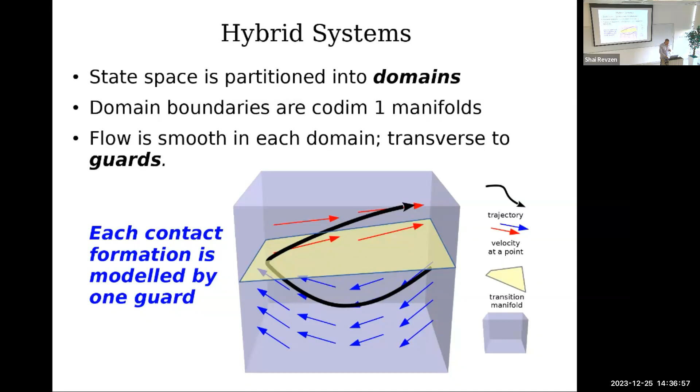So let's recap for a minute why we use hybrid models at all for these sorts of problems. It's because of this idea that physicists call a collision. What's a collision? It's something where we know the input state and we can deduce the output state. We don't care about all the mess that happened in between, because we have enough invariance to constrain the outcome. So all of you have probably done your undergrad...

Elastic collision: you conserve energy, you conserve momentum, you know what the outcome is. You don't care what happened when those two things hit each other. The outcome is predetermined. That's in general the theory of collisions, right? We reach a predictable steady state and avoid all the complications we might otherwise have, because we like this abstraction of rigid bodies that don't actually exist. You'll see that plays a role here.

Acoustic propagation through the bodies, which happens during a collision, plastic deformation, surface interactions—there's all sorts of complicated things we want to avoid modeling by using collisions and hybrid systems. But it turns out you can have all sorts of hybrid dynamics.

The most general form of hybrid dynamics is an arbitrary state machine. The guards represent transitions. So if we start here, if we cross guard number 1, we have a new state. If we cross guard number 2, we have a new state. If after 2 we cross 1 again, we have the 2-1 state, and here we have the 1-2 state. Basically, each history could have a completely different dynamic.

At the other extreme, you can have what are called complementarity systems. Those are used often in simulation of multi-legged systems—for example, work by Posa and Tedrake uses a lot of complementarity systems. There, each guard only gives you an additive effect. So if you go through B, you have F plus B. If you go through A, you get F plus A. But if you go through the second guard, what you do is completely determined—it's going to be A plus B. There's no more freedom in the system.

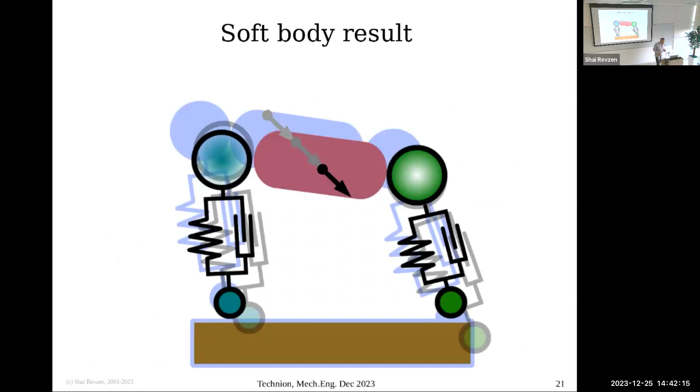Or if you think about it differently in the context of what I did before, it's really a soft body result. This leg hit the ground, it's generating some force. Now the other leg hits the ground, and it has its own additive effect on the center of mass. Both legs have interacted, but the center of mass is still continuing to move with its inertia and being affected by those forces. So that's a different way to think about why event-selected systems are relevant.

So let's talk a little bit about the mathematical properties. And by the way, all of this stuff is in this 2016 Applied Dynamical Systems paper.

So the idea of event-selected systems is you have a region of state space where you have some guards, and they intersect at some point rho. What we demand is that the flow is smooth in each of the domains between these surfaces. And furthermore, this is a somewhat weird condition, you might think at first, but if anyone's interested, I can explain why without it, very bad things can happen.

All the flows have the property that they are monotone with respect to the various guards. So if I have some guard function that has a zero level set at the guard, the Lie derivatives of these guard functions are all positive, strictly bounded from below. That means all the events will eventually happen. And once they happen, they can't reverse. You can't hit the ground and bounce back up. If you want to do that, you have to treat that as two different guards.

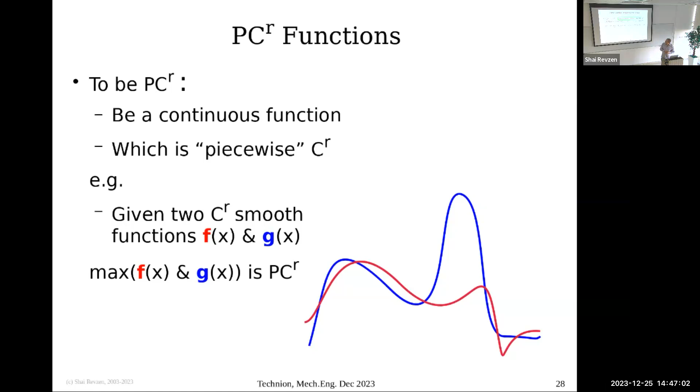And it turns out that there's a pretty interesting mathematical theory for those, and it relates to this idea.

I'm sure everyone here has taken analysis and knows about the directional derivative. A function is directionally differentiable if you can take this sort of expansion. This is the directional derivative, we have a scaling here, and we take the scale to 0. It has a derivative in the direction h if this limit exists and is 0. If this limit exists and is 0, the directional derivative is df.

There's a slightly less flexible notion of derivative where we change the limit. This is called the Bouligand derivative, where h here is a vector, and we take the limit of h to 0 as a vector.

If you do that, it turns out that for PC^r functions, this limit will always converge. When it converges, when the Bouligand derivative exists, it's actually the same as the directional derivative, because the directional derivative is just one particular way to take this limit. But there can be cases where the directional derivative exists and the Bouligand derivative does not.

But the interesting thing about the Bouligand derivative is that Bouligand derivatives together with PC^r functions recapitulate a lot of the standard theory of analysis. You have the chain rule, you have the implicit function theorem, all these standard building blocks of analysis exist there.

Question: When you take this last derivative, do you change the direction of h or keep it? Answer: You're allowed to change the direction of h because you're taking h as a limit to 0 as a vector. That's exactly the key point of what makes it different from a directional derivative.

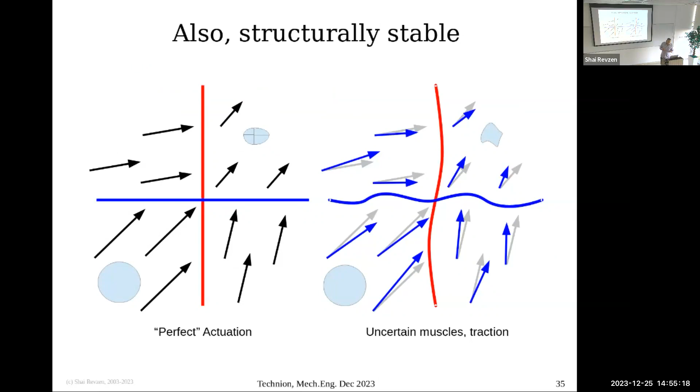Really, one way to understand what's happening in these systems is you can think of these surfaces and look at the impact times - the time it takes for each guard to happen. It turns out that if you have enough guards, you can rewrite your entire space just in terms of the times it takes for events to happen. Why is that a good system of coordinates? Because in that system of coordinates, everything becomes simple. All your flow is diagonal, because time flows the same way.

So time flows 1, 1, 1, 1 in all the coordinates - one unit of time per unit of time. All your guards are just hyperplanes. So really the existence of impact times being a nicely behaved function implies that there's a map that rectifies everything, and the behavior of the system is like the behavior of a flow box. Nothing bad can happen there basically because we have this nice conjugacy - a conjugacy that takes the dynamics in a real system into a flow box, and nothing interesting is happening in the flow box.

Okay, I'm almost done with all the annoying math, and we'll get back to mechanical engineering in a bit. We need to do one more thing, and that's talk about stability, because really that's one of the main things we care about in robotics and engineering in general, or in understanding biological control.

So how do we do stability in smooth systems?

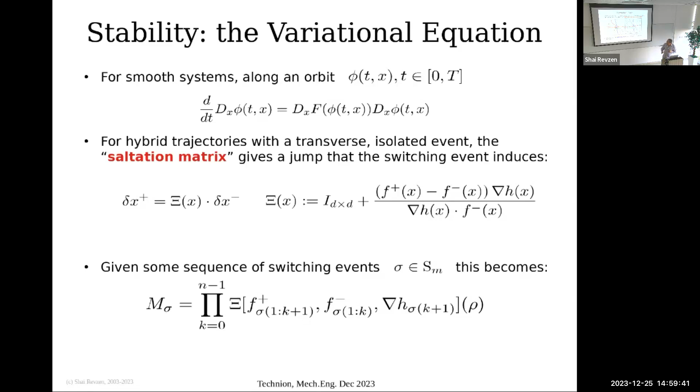The way to understand what happens there is we use this sampled vector field that's zoomed in, and we compute these projection operators, and we can use this to actually very quickly integrate multi-contact dynamics. To give you a sense of what I mean by very quickly, it's actually really simple to do.

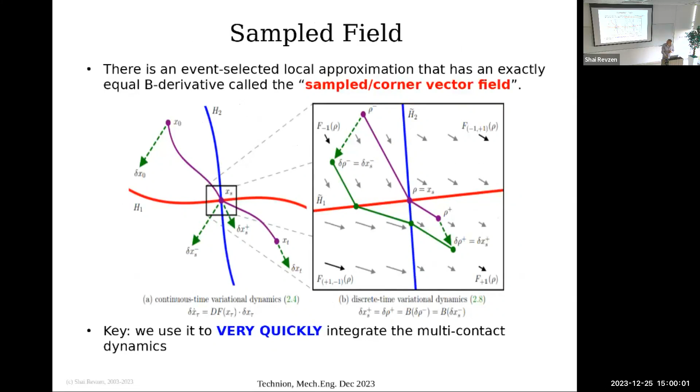This is in a paper we published a couple of years ago. The entirety of the Python code that does the computation of taking an initial condition through an arbitrary collection of hybrid transitions to its outcome is literally 11 lines of Python code, with about 40 pages of math to prove that they're correct. So it's one of those cases where the problem is a lot simpler than it looks on the surface.

So let's look at an example. Here's an example: we have a sort of two-legged system. It's a 2D problem. It can tip. It has two legs that can hit the ground, and both legs can hit the ground at the same time.

We have a spring damper that activates on ground penetration, and the spring dampers can be different for the different legs. So we can have some interesting dynamics here where there's a double collision point, and if we tip slightly on one side, one dynamic takes effect; if we're tipped on the other side, another dynamic takes effect. Without damping, the system is clearly continuous, but with damping, the velocity is actually going to have a different value the moment you hit the ground. So it can create a discontinuity in the vector field.

So if we take this system—the two-legged chair bouncing on the spring damper ground—and compare using a conventional integrator, which detects the events, runs an ODE integrator, detects the event, solves for the collision point, integrates to the next surface, solves for the collision point, then solves out, versus using our approximation, we get a speed improvement of about 1400 times using our algorithm. If we do that with a three-legged chair, we get an improvement of about 43,000 times faster. It's just spectacular—it's the difference between dealing with a hybrid system and basically dealing with a smooth system. You don't even feel the fact that you're working on a hybrid system.

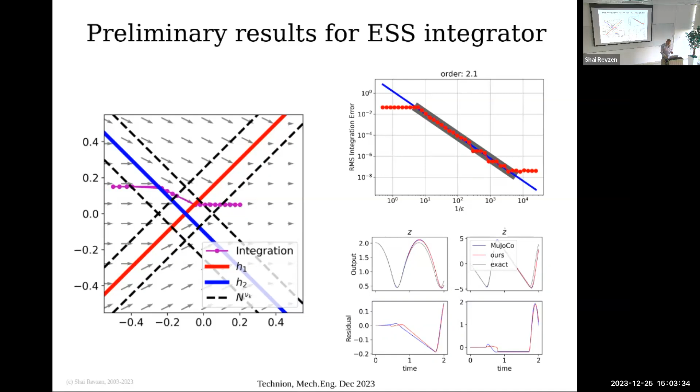So let's get back to mechanics. Now consider a mechanical system with these conditions. Mechanical systems are generally second order, but let's say our guards only depend on position—potentially they could depend on velocity as well, but let's say they depend only on position. Most manipulation and legged locomotion problems are like that: whether you make a contact or not depends only on position coordinates, not on velocity coordinates.

And the other thing is, let's assume the situation is one where we have additive effects. This is a situation other people looked at as well, but it's fairly common that when you establish a contact, you add a force, and these forces are just an additive effect.

Now, why is that interesting? Because the sum doesn't depend on the order at all. So what this means is, it's a very strange result, but the order of collisions didn't matter—you're going to get the same derivative. The result is exact, not after truncation. This is an exact collapse—only the first order term, which is the sum, survives this product. So the order of collisions didn't matter.

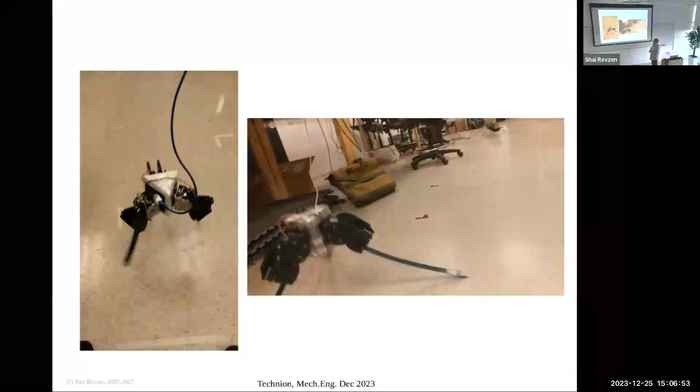So we wanted to build a 3-legged hopper. These are our first attempts. We put some spring legs, and these hoppers hop pretty nicely.

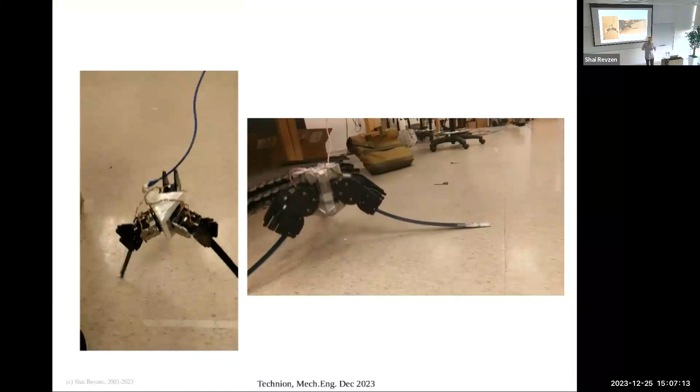But we discovered something kind of annoying: even though they look like they're hopping, that's a lie. What they're really doing is losing all their kinetic energy on the collision with the ground, and then the motors are regenerating all the energy for the next hop. So if you ask, does this robot remember its history? Does the initial condition actually survive the collision? No, the initial condition is completely annihilated. Your perturbation energy goes to 0, and then you're regenerating an entirely new hop.

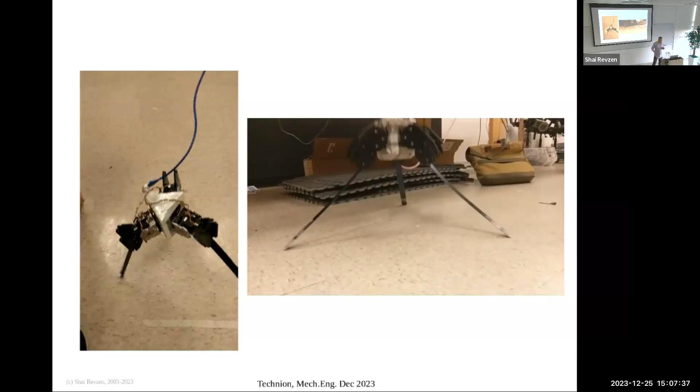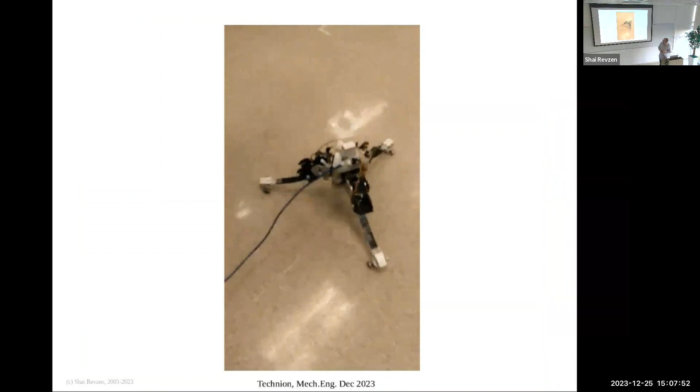So we tried to improve by changing the legs. These legs have rollers now, different kinds of springs, only position sensing on the motors, and an even better wheel to prevent friction, because we thought we were losing all the energy to friction with the ground. We tried a bunch of different springs, pairs of leaf springs with different kinds of bracing in between them. This is a high-speed camera. This one buckles completely, this one buckles less, this one doesn't buckle at all. We're trying different kinds of springs to try and achieve recovery somehow.

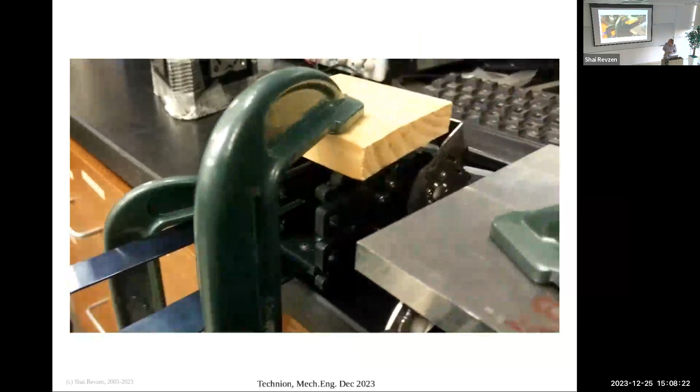All of that didn't work until we did this experiment, and it made us realize what's going on. So what you have here is a spring clamped to the table, spring clamped to its attachment, spring attached to the motor, motor turned off. The motor is killing all our energy.

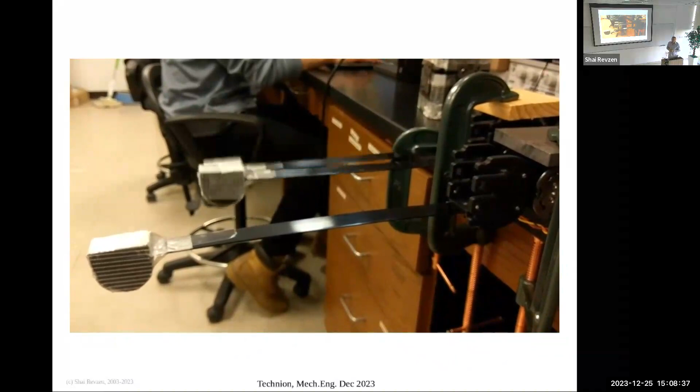Basically, whoever told you that series elastic actuation conserves energy was halfway lying, because if you have a PID controller on your motor, what's the PID controller doing? The D term is pretending to be a damper, and it's taking all the energy out. It's not pretending. That's its job, to take the energy out. So that means you're losing all the mechanical energy in your system, and that mechanical energy is an expression of your initial condition. And so if we want dynamics that actually go through a collision and survive that collision to have some meaningful outcome, so we can prove this theory works, we need to do something different.

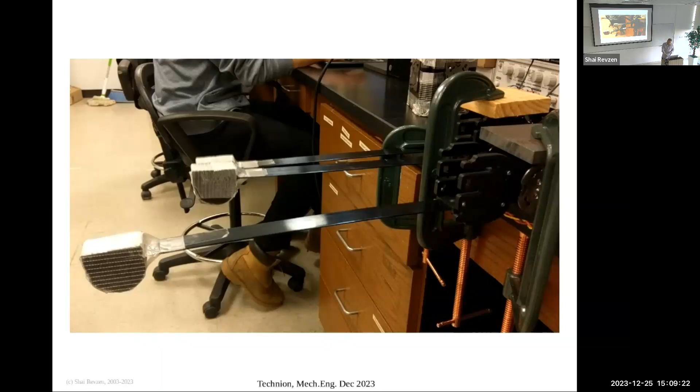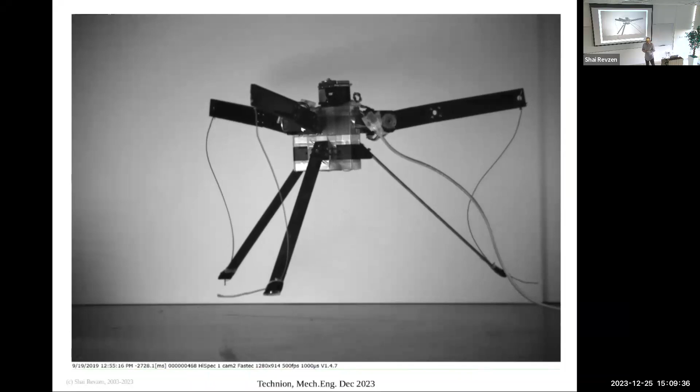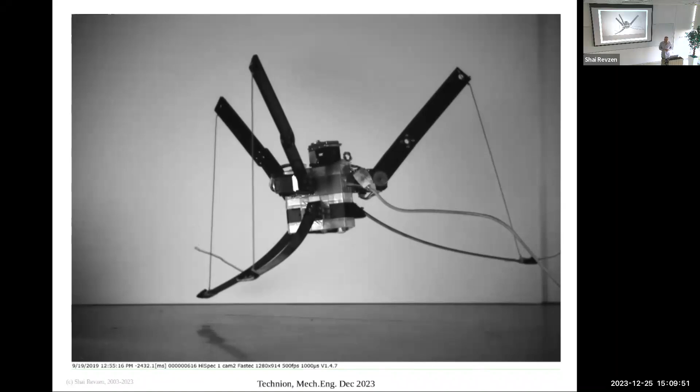And that something different is this guy. So the cables preload the springs, but when the springs hit the ground, they're interacting with the ground without a motor in the way. And so this robot conserves slightly over 40% of its energy from hop to hop, and allows us to do the experiment we needed to do. So that was 1.5 years of our lives to figure out where the energy was going and how to build a hopper that was actually not nonsensical.

I suggest parallel elastic actuation if you want to conserve energy.

And so this is what you get in real time. On this robot, we have 3 markers on the body of the robot and 3 markers on the legs, and you can get a sense of what the dynamics are. This is the body Z, and this is the distance between the body and each of the legs. You see, as the robot is pulling up, it's also pulling the legs up, then falling down and colliding.

Are you guaranteed periodic motion here? The periodic motion comes out of the dynamics, so no, there's no guarantee. What the robot is actually doing is as it lands on the ground, the cables go slack at a rate of about 10 hertz. We're polling the motors for load, we realize the motors are unloaded, and so we push them down so the cable will go completely slack. Then at a certain time after that, we start pulling the legs back up. The command to the motors is the same position commands to all motors.

Giving the same command to all the motors, so there's no feedback. The only feedback, these motors themselves have PID control, so they do, but there's no feedback based on the performance of the orientation. Why do you call it a robot? Well, it's not a robot, it's a hopper, it's a hopper mechanism.

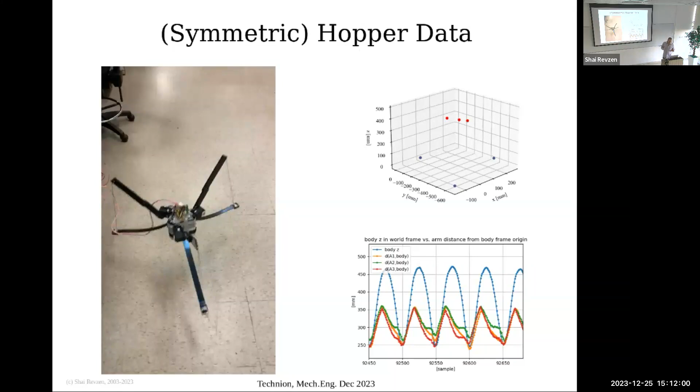Okay, so let's talk about how we analyze the hopper data. First, what is it that we plan to show? We want a hopper where we can show that each leg does something different. We do that by showing that if you take the flow of the state of the robot from the collision of leg number 1 to some point a few frames later, but before any other leg is hit, the affine model of that flow is statistically different, clearly, from the affine flow done by leg 2 and by leg 3. So there's no question that each leg does something different.

And then we want to show that by the time all three legs have acted, the matrix derivative exists for the map and it works for all combinations. That will prove what we claim, that the flow is smoother than people think, even though it's made out of pieces that are different. Those pieces mesh together to make a smooth thing on the outcome.

Is there a boundary to the difference between there should be? I mean, the boundary is the collisions of the legs. Those are the guards. Properties of the springs? And so springs are different. You have, how different can they be? They're different enough that you'll see it in a moment.

Okay, because at some point they're going to lose stability. So this is actually very robustly stable for reasons that I can get into. You're talking about a collision. Really, this is a very long time elastic deformation, and that itself is probably stabilizing to a certain extent, because you have everything, it's not a collision.

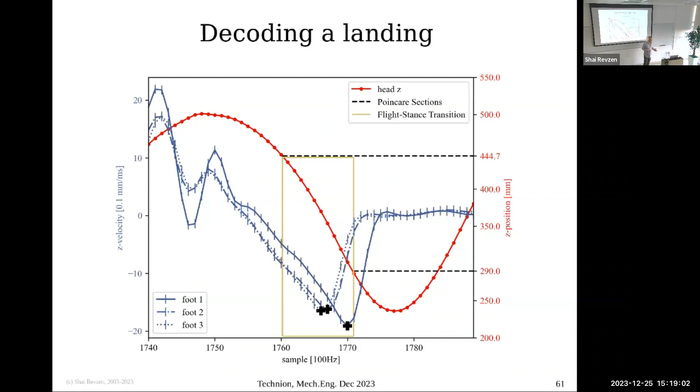But if we look at the input-output behavior - this is a bit trickier, and the statistical methodology question here will be out, we won't have time to discuss it. What we're doing here is total least squares regression. A total least squares regression, in this case on a 12-dimensional state space, is really looking for a 12-dimensional hyperplane in a 24-dimensional space.

What we want to show is that we have 6 of these hyperplanes, one for each collision sequence, and that they're identical. How do we show that they're identical? Well, there's a way to measure distance between hyperplanes - it's called the geodesic distance on the Grassmannian.